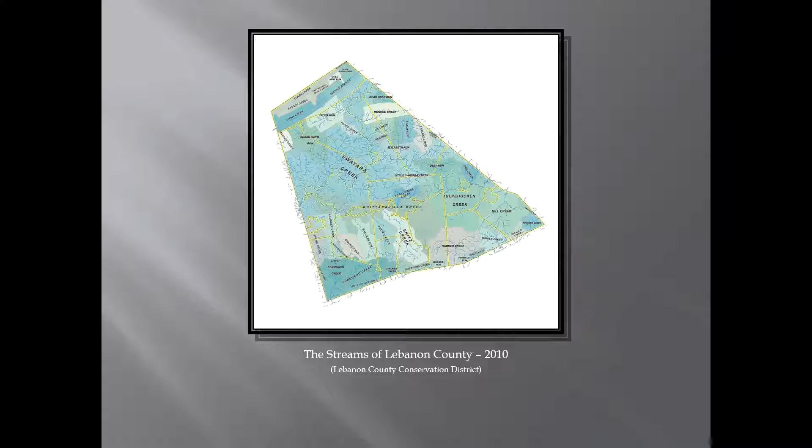Birkenbein's report gave the following: Little Swatara could be dammed at Horseshoe Bend near Stover's Mill. It was the closest approach to the borough. However, the steam engines would have to pump intake water 220 feet high to pass over the gravel hill into a reservoir that would have to be built at 8th Street near the railroad.

The Quittapahilla source posed different problems. Its origins, 2 springs 360 feet apart, had been in current use by the Union Canal Company for a dam east of the city. Its use would require purchase of the dam and a plan to divert water into a reservoir.

The Schnitz Creek required getting control of Zinn's Mill, diverting road and barnyard runoff, and constructing impounding ponds to prevent damage to the pumps. In consideration was the unpredictable future activity at the Cornwall ore mines, which had an effect at this site.

If the South Mountain was chosen, then the borough would need to acquire horse mill lands and install a reservoir.

Of primary importance for a water supply was demand, present and future. With the idea of an increased industrial and residential use, it was agreed that a 3 million gallons a day use was realistic. The contract was eventually awarded to D.F. Minihan of Hanford at a cost of $152,000. Birkenbein was chosen as chief engineer.

Henry Horst conveyed to the borough 24 acres and 32 perches of land and a sawmill for the consideration of about $6,000. Samuel Horst owned an adjacent tract of land, and for a consideration of nearly $10,000, he conveyed to the borough a grist mill and certain water courses and rights.

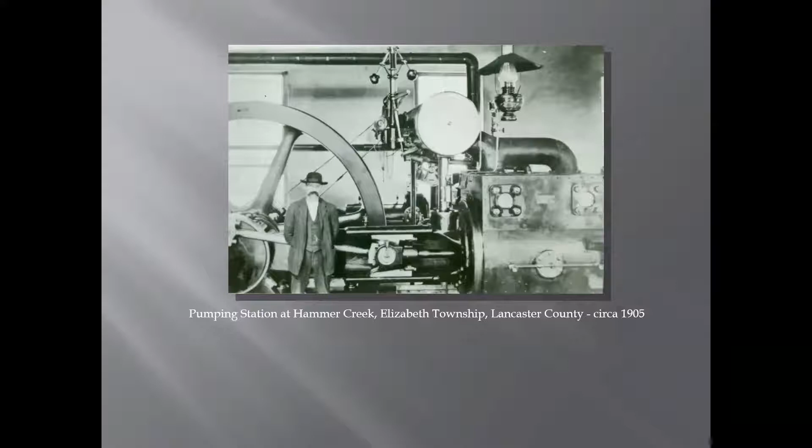In 1911, a caretaker's house was constructed at pumping station. For many years, George D. Getz and his wife, Cora, resided here, raising their 6 children.

A series of these gates controlled the amount of water flowing into the dam at Poplar Run.

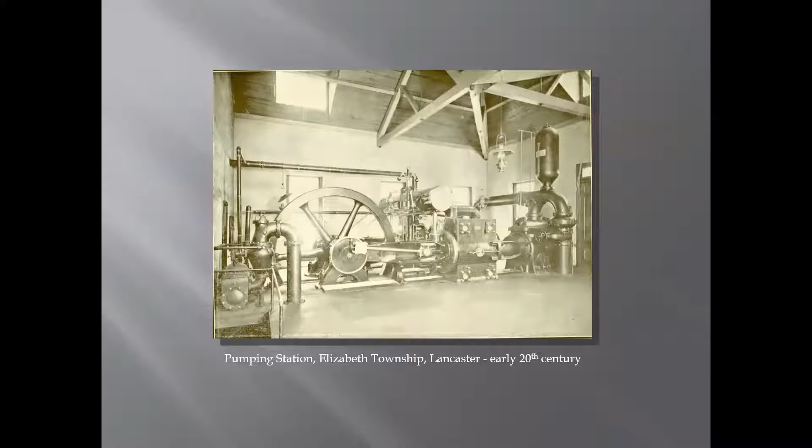While on the job, the caretaker at the pumping station became greatly alarmed with another situation, and he hesitated to report it to council. The pump room was lit by kerosene lamps suspended from wooden rafters. In addition, the floor of the room was oil soaked. If a lamp exploded, the entire plant would be demolished. So the caretaker urged that lighting be immediately changed to electricity furnished by a water-powered generator or by batteries.

Because of the increasing cost of coal, an earlier study had been made to determine the difference in cost between the usage of coal and electricity. The savings at that time did not justify replacing steam boilers with electric motors.

Now the engineer found, due to their deteriorated condition, both steam boilers were needed to operate a single pump. If a severe drought was encountered, both pumps would need to be operating simultaneously. The engineer urged that council undertake a study to electrify the entire plant.

The mayor also urged a study for the replacement of another dam in a ravine west of dam number 3, a fourth dam, and to replace steam power with electricity at Hammer Creek.

The switch from steam power to an electric system was finally approved in April of 1925 at a cost of $8,000. The project included the purchase of a generator and wiring for electric lights at Hammer Creek. Lights would be placed in the pumping station structure as well as in each of the rooms of the keeper's house. The pumping station became the state's first electrified pumping station.

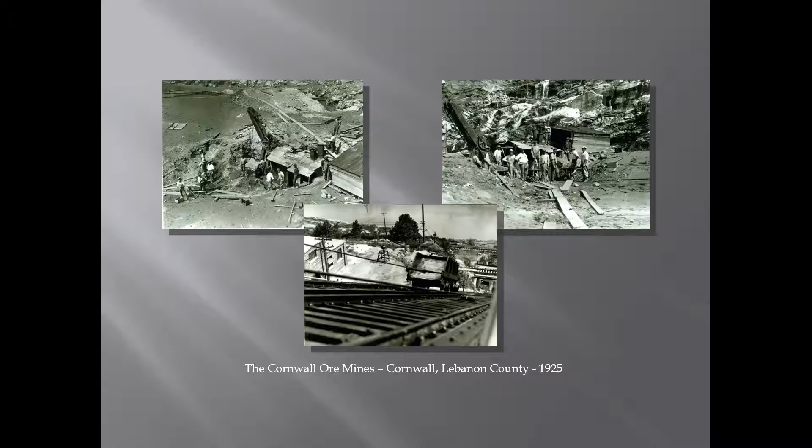In addition to buckets, picks, shovels, and wheelbarrows, the cars on the slopes of the Cornwall Ore Bank's incline were put into service to help remove the water, mud, and other debris from the pit. The storm, dubbed a cloudburst, was reported to be the worst storm in the history of the area. Operations at the ore mines would eventually resume as normal. Here you can see a before and after, so it gives you an idea how deep the water really was.

An immediate plan was to rebuild number 1, abandon dam number 3, and build a new dam in the ravine west of dam number 3. In the end, however, temporary chlorinators were borrowed from a supplier and installed at the valve house of dam number 2. The dam was fed alum to settle out mud.

Repairs would be made to the dams number 1 and 2. A new electric pump would be installed at the pumping station, and special officers were employed to keep all persons away from the area. Work was done by city employees and supervised by the city engineer. It was to be a faster and less costly method than accepting bids on the project. All workers were assigned to the South Mountain to clear debris and prepare for reconstruction.

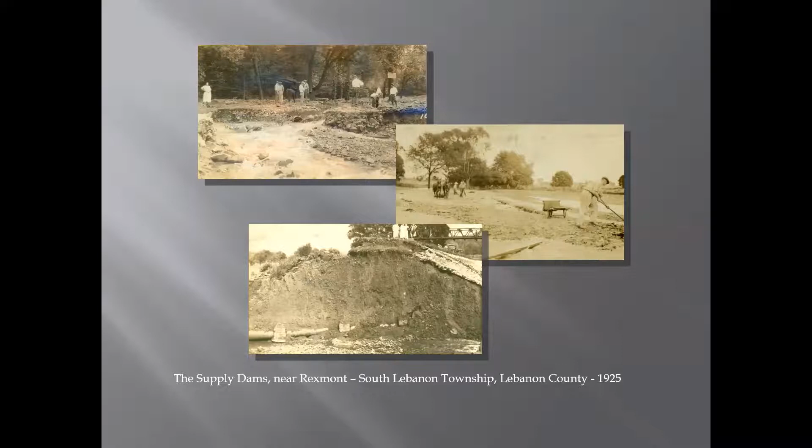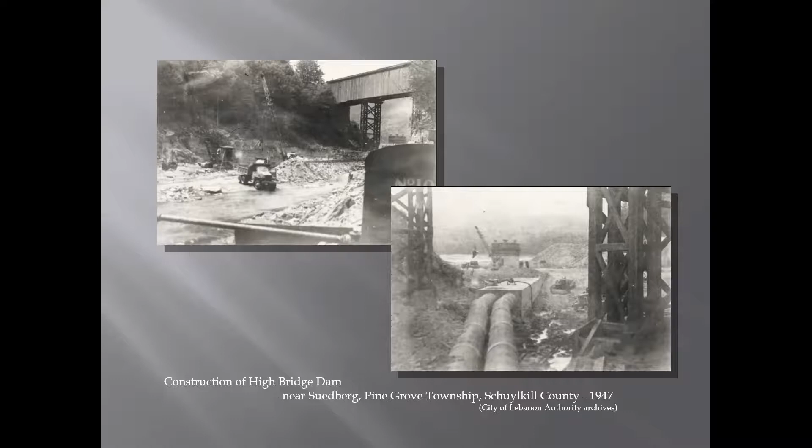Construction began in early 1946. These views show the construction of the new dam spillway that was built under the old Schuylkill and Susquehanna Railroad Company's bridge.

At a cost of $3 million, this new dam was completed by late summer of 1948. It impounded 310 million gallons of water and covered a surface area of about 55 acres. Its construction inundated the old Native American trail that passed through this gap between the portion of the Blue Mountains known as Second Mountain.

The construction of a control and treatment building located at the base of the dam for adding chlorine for disinfection and lime to raise the pH level was also included in the project. In addition, the building included an office, a flow meter, valves to shut off power, a diesel generator, and a lab for testing the quality of water.

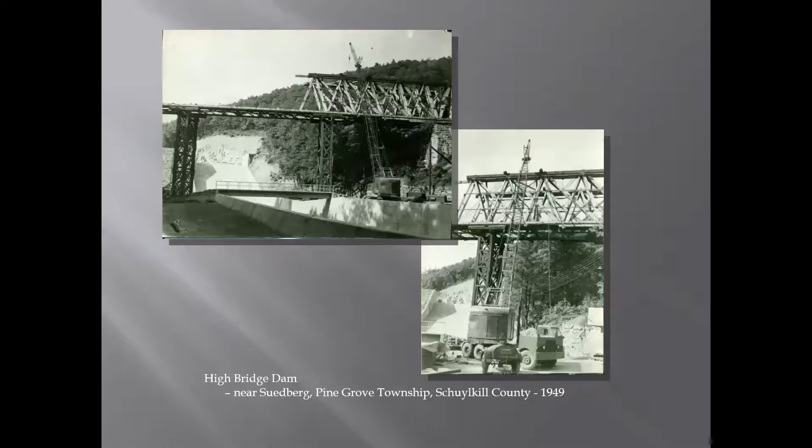Due to safety reasons and its age, the old bridge of the Schuylkill and Susquehanna Railroad Company, by this time known as the Lebanon Tremont Division of the Reading Railroad, was dismantled in the summer of 1949.

In May of 1917, the property was purchased and operated by the Bethlehem Steel Company. It supplied water not only to the Bethlehem Steel Company's main plant in the city of Lebanon, but to the Indiantown Gap Military Reservation, Lebanon's independent borough, and the Cleona area. The Lebanon Water Authority purchased the property and water rights in 1952.

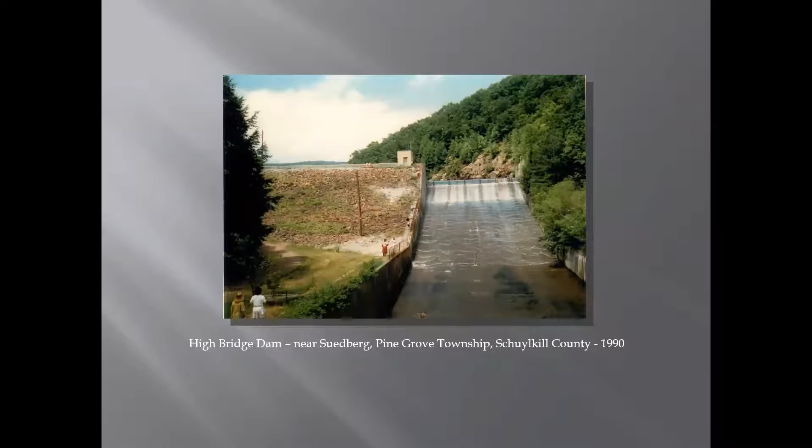This new supply of water would prove to be satisfactory for a relatively short period of time. With the severe drought conditions in the summer of 1980 and the increasing number of municipalities tapping into the system, studies would be made for the possible construction of another dam.

Despite a number of obstacles, hopes of constructing a 125-foot concrete dam downstream from the existing dam became a reality in June of 1991. Ethel Siegrist, widow of Christian E. Siegrist, assisted local and state officials to break ground for the new dam on Wednesday, June 19, 1991.

Mr. Siegrist, for whom the new dam and reservoir would be named, had been a 50-year employee of the City of Lebanon's Water Authority.

Included in preparing the site, the Pennsylvania Historical and Museum Commission required the old Swatara furnace stack to be stabilized due to the increased number of heavy vehicles and equipment being moved near the site.

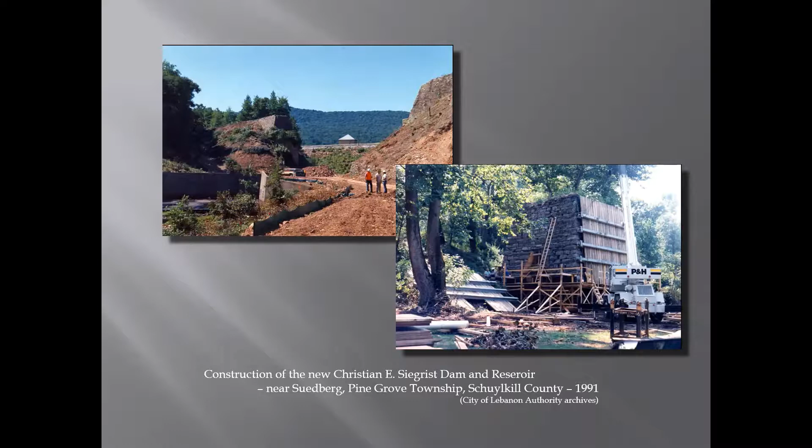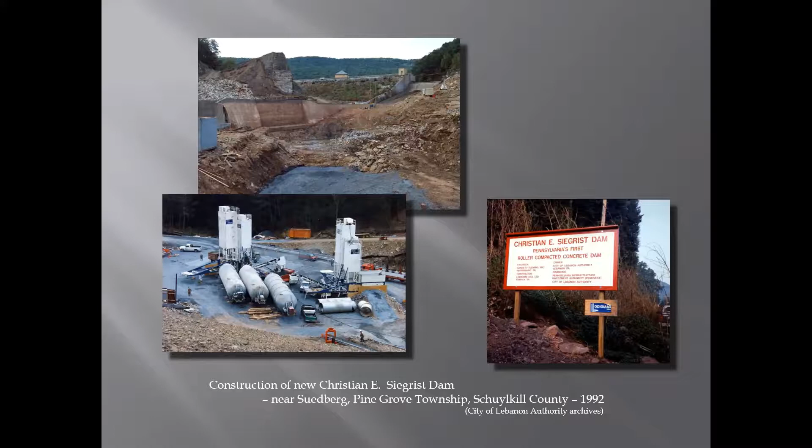The new dam had to be anchored to solid bedrock. Countless loads of stone were delivered. In addition, a concrete plant was assembled on site, as well as a conveyor system to deliver the concrete.

The roller compacted concrete work began in April of 1992. Occasional heavy rains temporarily halted production.

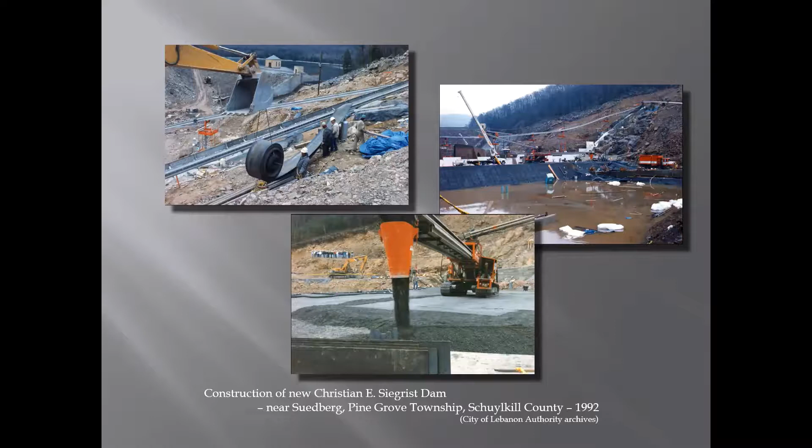Located about 400 feet downstream from the High Bridge Dam, the new Christian E. Siegrist Dam was the first of its kind. For 100 consecutive days, concrete was poured and rolled on site. It was to become Pennsylvania's first roller compacted concrete dam. The former High Bridge Dam was an earthen and poured concrete structure.

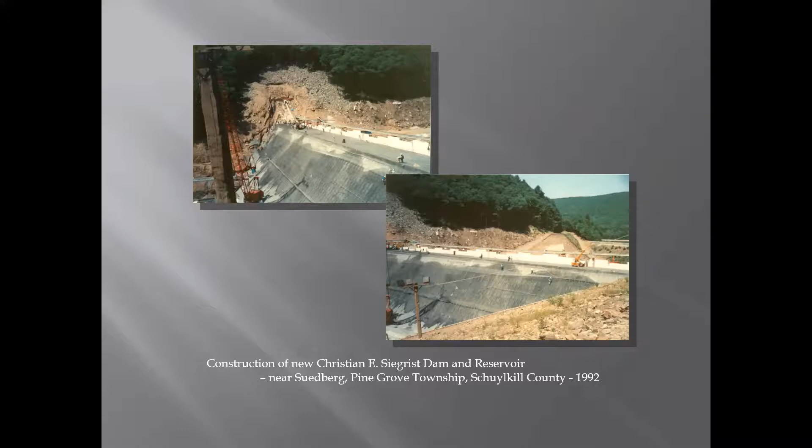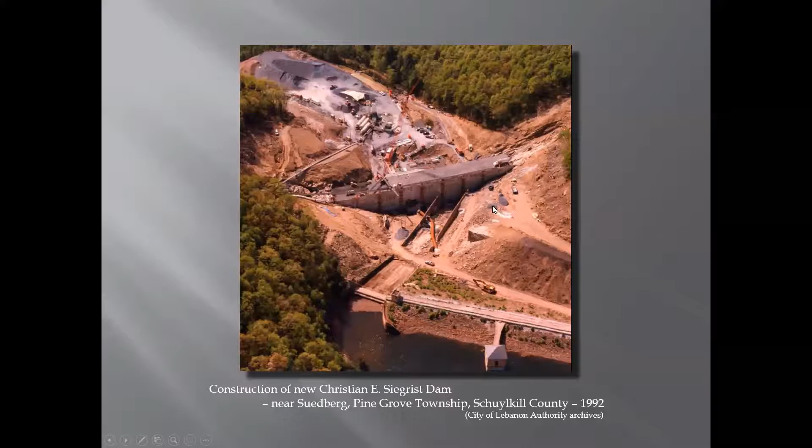Water slowly collected behind the earthen wall of the former dam until it flowed into the dam breast and spillway, flooding a 400-foot long section of creek bed before backing up behind the higher wall of the new facility. The old dam breast and block wall monitoring station were not removed. Today it remains submerged in about 30 feet of water.

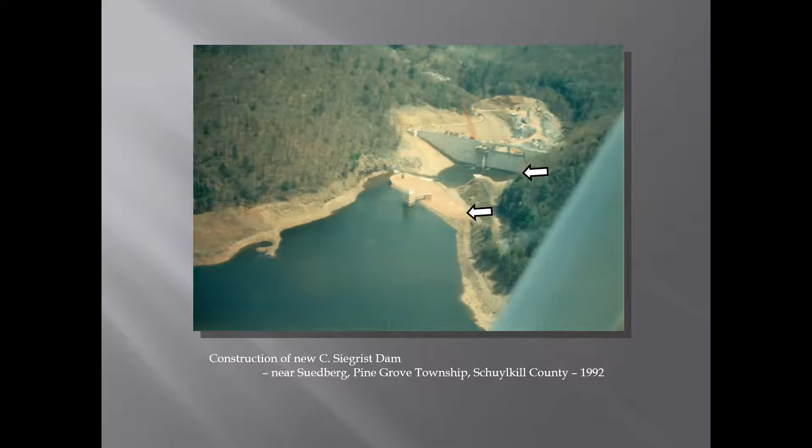The new dam is bigger in every way than the 45-year-old Highbridge Dam it replaced. A comparison of the two dams is as follows: with a height of 131 feet and a length of 700 feet, it is 66 feet higher and 100 feet longer than Highbridge. And with a volume of 1.18 billion gallons, it impounds 3 times more water than Highbridge.

With the completion of the new Christian E. Siegrist Dam in 1993, the Daily News stated that residents served by the Lebanon City Water Authority will easily weather a severe drought lasting several months. However, during the summers of 1997 and 1999, drought conditions prevailed longer than expected, and conditions were beginning to look quite severe. Today, the Siegrist Dam and Swatara Creek supply water to the City of Lebanon, Cornwall Borough, the Village of Fredericksburg, West Lebanon Township, and the Pennsylvania American Water Company.

Lebanon Reservoir, as it is sometimes labeled on maps, has a surface area of about 106 acres and drains an area of about 15 square miles. Evening Branch, Fishing Creek, and other unnamed tributaries make up the impounded waters. The excess water from the reservoir flows downstream into Mill Creek before joining the Swatara Creek.

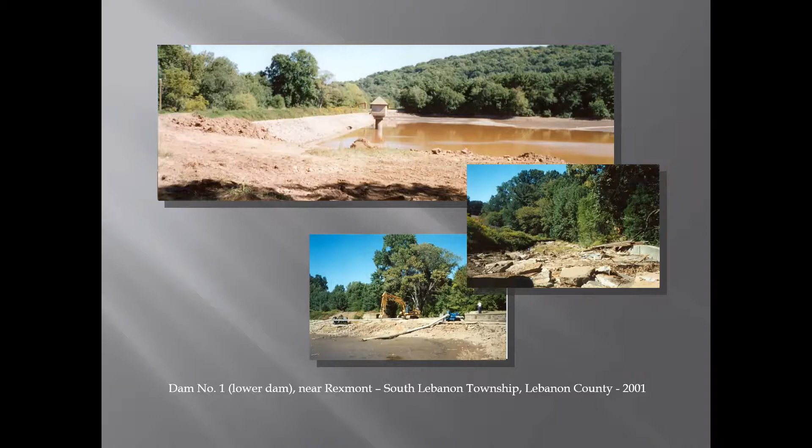Prior to its breaching, the Pennsylvania Game Commission utilized the Pennsylvania Fish and Boat Commission to remove and relocate some of the fish that had been located within the former water supply. They had stocked it yearly.

Efforts from the Friends of the Rexmont Dams organization were quickly put in place to try and save the remaining upper dam. But by early fall of the next year, dam number 2 followed the fate of its predecessor.

Shortly after the breaching of the dams, the DEP drew fire from the Lebanon County Commissioners. The county officials criticized the draining of the watershed during a summer drought. The DEP had demanded citizens save water during this drought, but yet they deemed it necessary to drain millions of gallons of water from dam number 2. The county commissioners were unsure if draining the dam violated the emergency drought proclamation, but as Commissioner William Carpenter stated, it's a violation of common sense.

DEP officials claimed they had not violated the governor's drought emergency by emptying the dam. Their published statement read as follows: drought regulations don't interfere with unsafe dams, thus ending the final chapter in the history of the old supply dams.

Today, you won't find lovers strolling along the once peaceful waters, nor will you see local governing officials gathering to inspect or survey the site. Nor will you see people swimming or strolling around the cool waters, or skaters gliding and falling on its once frozen waters. Of course, you won't be able to venture out onto the walkway of the valve house to drop stones below.